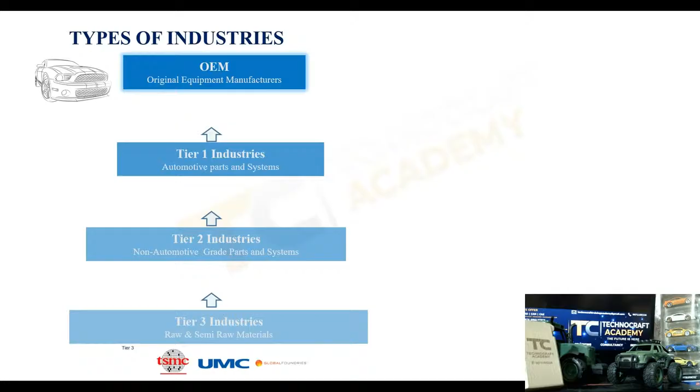And then we also have Valeo, Continental is for the ADAS, in India we can actually say that. And we have ZF.

When it comes to OEM, we have Volkswagen, GM, Toyota, Honda, Ford, Mercedes-Benz, Daimler, Tesla. When it comes to the Indian market, we have Tata, Mahindra and Mahindra, Suzuki, and Hyundai. These are the OEMs we can call it.

To build a particular car, they'll be having a lot of connections and contracts with the tier one, tier two, tier three companies, and they get all the relevant information and manufacture a medium industrial equipment, or else the complete car, truck, or bus, whatever it is.

Now, why do we need these tier one, tier two, tier three industries when the OEM can do everything by themselves? So why do they need to connect like this? When it comes to this answer, why they outsource, in short, they want to save on cost. Let's say if you want to hire someone, assume you're working in TCS, Tata Consultancy, or Mahindra, they need to pay you, right? And then you are a permanent employee of that company, right?

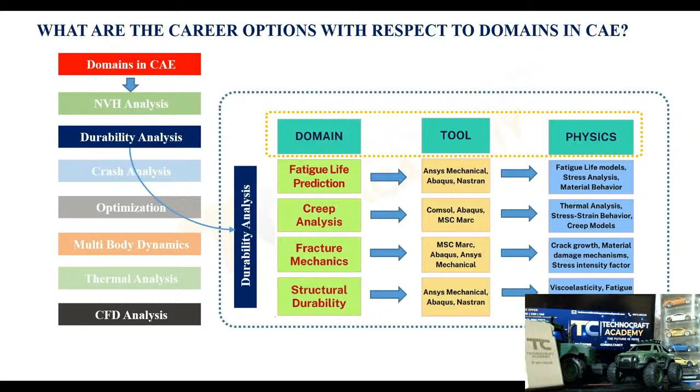Okay, assume you have a component, cranks or knuckles, whatever it is. You have designed it and it is weighing around 8 kg or 8.5 kg. That weight might not be needed. So let's say if you're working with the OEMs or any of the large scale industries, if a particular component or part is weighing that much and adding a lot of mass, what you can do is run the topology optimization and shape optimization as well as the sensitivity analysis to reduce the mass of it and also improve the performance of

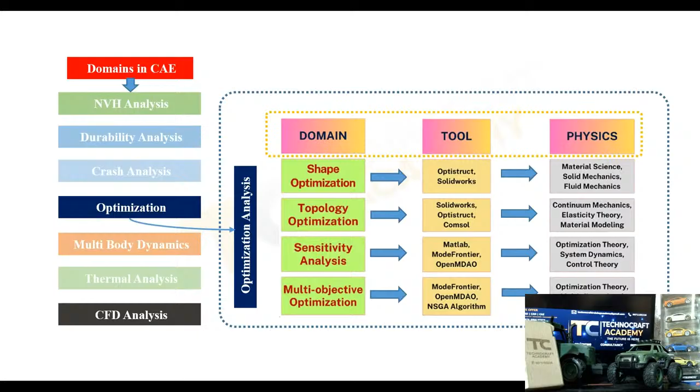the component. Also, whatever design you might have done might not be optimal to withstand that particular load, which is shape and sizing. You might even achieve the same requirement with less mass. That you can do here. When it comes to optimization, if you're working in small scale and medium scale, I recommend you use SolidWorks, but most predominantly OptiStruct will be used. So you could see the physics behind it. We can refer to it later also.

Let's see crash. When it comes to crash, there are a lot of things you can do under crash. It can get very difficult for you, so you need to start with any of the other domains and gain the knowledge out of it. See, we have crash. They couldn't handle the crash, so one of them had fallen on the wall, and the entire family died.

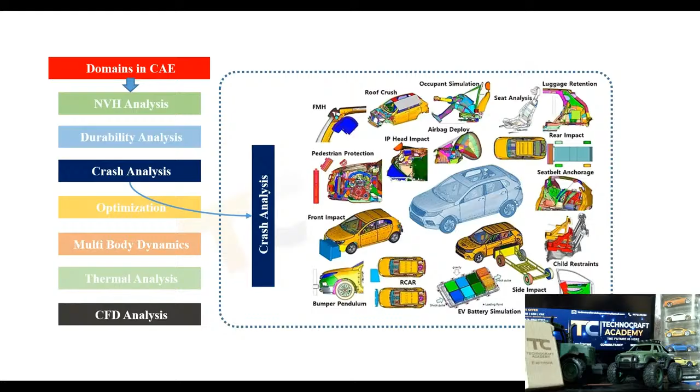Right. So same thing, occupant safety we have. Seat analysis, rear impact, side impact, child safety, EV battery simulations, car impact, the bumper, pedestrian. So a lot of analysis is there, even front impact. With all these analyses we optimize the car, and based on that we get ratings. Cost and all these things are very important. I hope you got to know a few things about all these domains. So first study accordingly, gain your experience, and get into the field if you're a fresher or you need experience.

Now let's start looking at it fresher-wise. If you're a fresher, you can start with OEMs like Tata or Mahindra. If you're an Indian working in other countries, let's say you target the biggest: Toyota, Suzuki, Mercedes, BMW. Getting into these as a fresher is quite difficult. If you are from the top universities, you can get in. But if you're a student of a local university, it's very difficult, so you need to gain experience. Now, what do we do? You need to set a strategy and a basic framework for that.

So how? First, know about yourself, where you're standing. If you're mechanical, you can consider aeronautical too. Where you're standing, what are the basics, what fundamentals you have. If you don't know anything, you can start from scratch. You can refer to strength of materials and build your basics. Or else you can do an MTech also if you're a graduate.

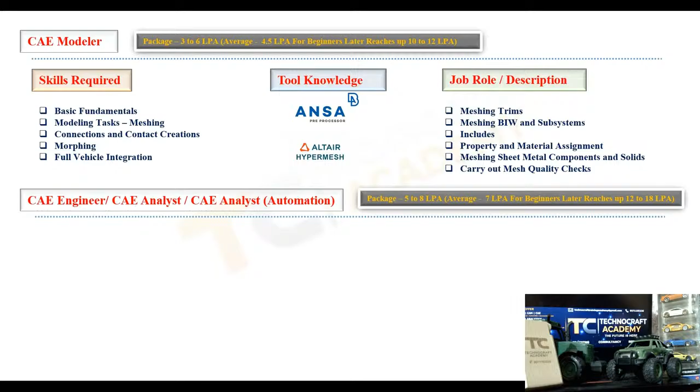And when it comes to CAE engineer, CAE analyst and CAE automation, CAE analyst automation, we call it. Yeah, this is the foremost job in your career, we could say. So the package will start with 8 LPA or 7 LPA if you're directly getting into OEMs. Yeah, and then it might go up to 18 LPA and then 25, 30 LPA. It depends.

Yeah, so what's required: you need to know about analysis, static and dynamic simulations, linear and non-linear dynamic simulations, explicit analysis, NVH, durability, automation, and then model debugging skills, optimization, coding also. See, automation engineer, so you should know about Python scripting also so that you can implement the automation. Let's say I want to do some automations, so you know the coding so that you can just process your simulation or validation.

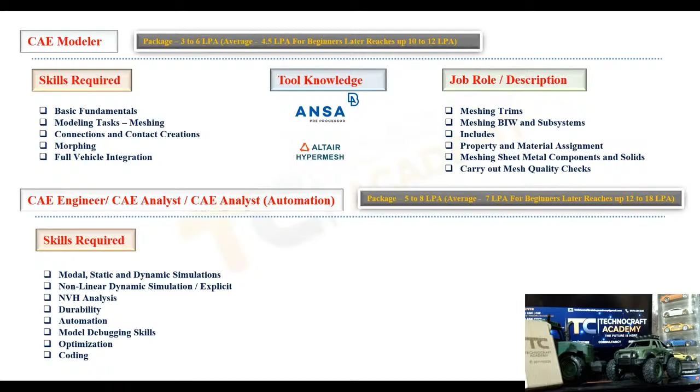Yeah. In short, what I could tell you is if I just want to post-process the results, automatically HyperView should open, and then it should load the stress and displacement, and then it should give me the graphs, and it should also plot the stress-strain curve for the non-linear analysis. And yeah, this is what it should be. How you want to script it. Simple. Tools known. So as I told, LS-DYNA, Abaqus, OptiStruct, ANSA. I think non-linear. Contact is important everywhere it is used.

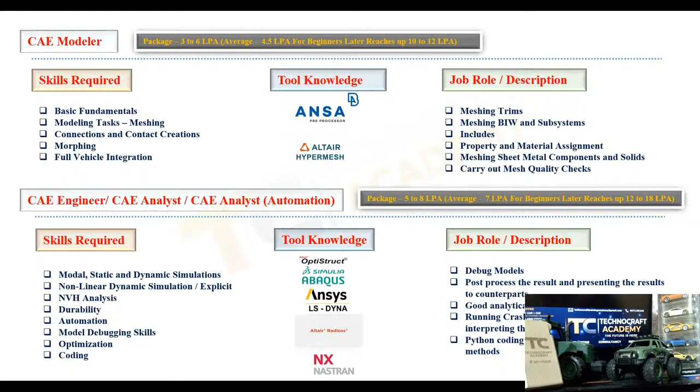Well, job role I told you, debug the model, post-process it, result presenting to the counterparts. You should be best in communication skills. Very important, guys. If you're weak in communication, you're gone. Better go through these spoken English sessions and try to improve your communication skills. Yeah? And then running crash and NVH jobs and interpreting the results. Very important. If you're failing to do that, then you're gone. You'll be fired on the spot. So next, Python coding for the automated process and the methods are also important. Yeah. Now this is all about the job roles, guys.

Now you already got to know what exactly you need to do if you're a fresher, what would be the career options for you. You got to know that. Now, we'll start our mastery in CAE from the scratch, starting with the history of FEA and FEM.

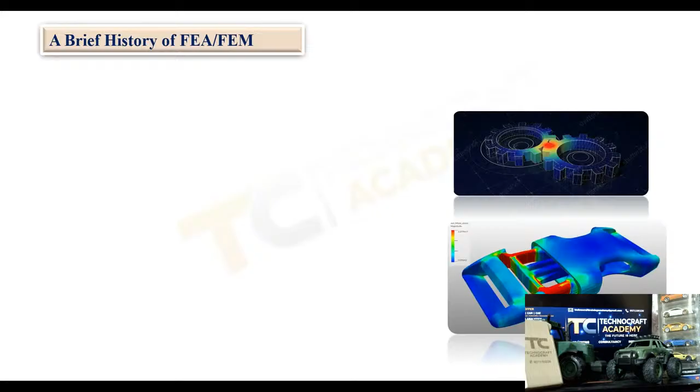Yeah, if you see, we have the brief history. I could grab a few things, not everything. If you want more details, please refer to some of the FEA books. But whatever is possible from my side, I tried to extract it and put it forward so that you can understand everything. Yeah, let's go through this.

First thing is, when exactly FE comes into the picture: the first paper, Stiffness and Deflection Analysis of Complex Structures, was published in 1956 by Turner, Clough, Martin and Topp. We generally consider this as the birth of the current finite element methods. Now, after that, in 1960, Clough coined the term finite element. Very important. He was the person who used this terminology.

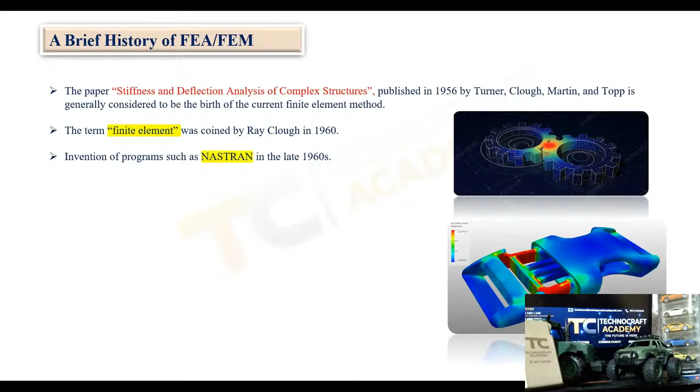Finite element. After that, there were programs like the Nastran we're currently using, right? In the 1960s only, they started developing programs to run this kind of analysis. And then there is the Courant approach: they divide the domain into finite triangular subregions to solve second order elliptic partial differential equations. It was mostly used for the torsion of a cylinder during that time.

Then later, this contribution was very important and evolutionary. They developed the partial differential equations. You could see the names of them: Rayleigh, Ritz, and then Galerkin. Together they developed these partial differential equations to solve the large body. We'll see that in detail next. And then later on, the finite element method was provided with a publication by Gilbert.

Then it started being used by different industries in electromagnetism, dynamics, structural analysis, everywhere. It was revolutionary, and everyone started using it to run the analysis and validate it before doing the physical testing. Physical testing takes a lot of money and time, so this helps us a lot to save money.

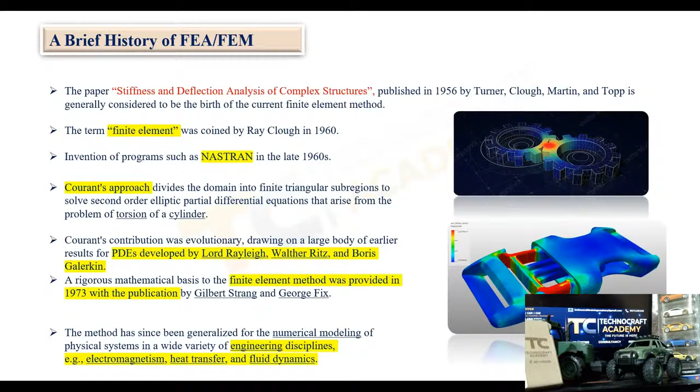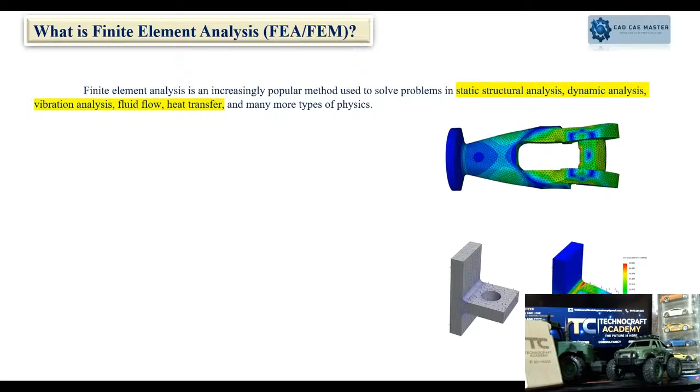Now, what is finite element analysis or FEM? You could see the definition here. Finite element analysis is an increasingly popular method used to solve problems in static structural analysis, dynamics, vibration, flow, heat transfer, and many more physics also. In short, finite element analysis is used everywhere.

For example, a classical analytical method considers a differential element to develop governing equations, usually in the form of partial differential equations. You're hearing this word again and again, right? If you're a fresher, that is all you might see. But you need to know about partial differential equations. Very, very important.

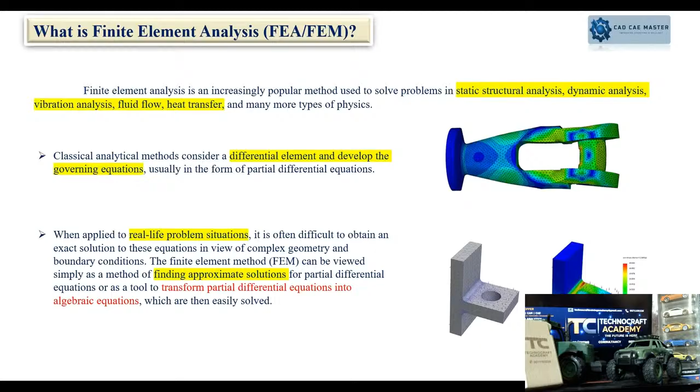If you consider a real life problem, say you want to obtain an exact solution for the equations of a complex geometry, practically can you do it? It is very difficult using the boundary conditions. Solving it only for 1D elements we could do, but for large components how is it possible? For that, FEM is a simple method: it approximates solutions for the partial differential equations, solves them with programs and gives the results, and you convert them into stress or strain, whatever it is. Let's see in detail how it is going to help us.

Finite element formulation. A solution for a field variable satisfying both boundary conditions and differential equations is unknown in general. Let's say you want to define boundary conditions, where you fix it, where you apply the load. How the equation is going to form, we don't know. So we begin with a trial solution. What is a trial solution? In short, it is used to satisfy the boundary conditions. Boundary conditions equal zero in this one.

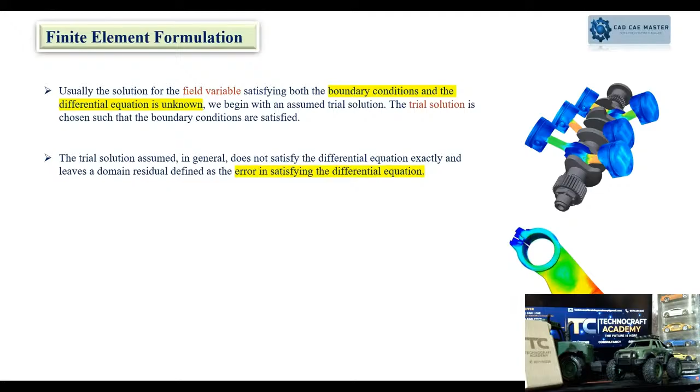Now, the trial solution does not satisfy the differential equation exactly. There will be a small error with respect to the differential equation. How are we going to correct this? For that, we have the weighted sum of the residual. This comes into the picture. We add approximate constants to render the entire residual to zero. It is quite difficult to grasp now, but if you go through it, you will definitely understand it.

Next, we try to discretize the domain into several segments, called finite elements, and use several piecewise continuous trial functions. What are these continuous trial functions?

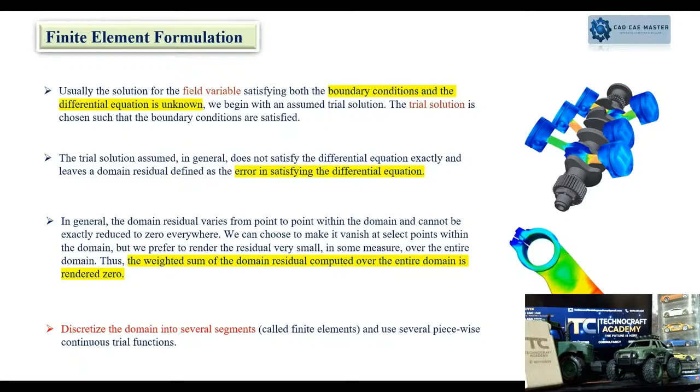Now, when it comes to trial function, it's just a segment in a particular... For example, let's say we want to solve a particular element inside the geometry. So we take it as a main function. Okay. And then in that, for each segment, we define a shape function.

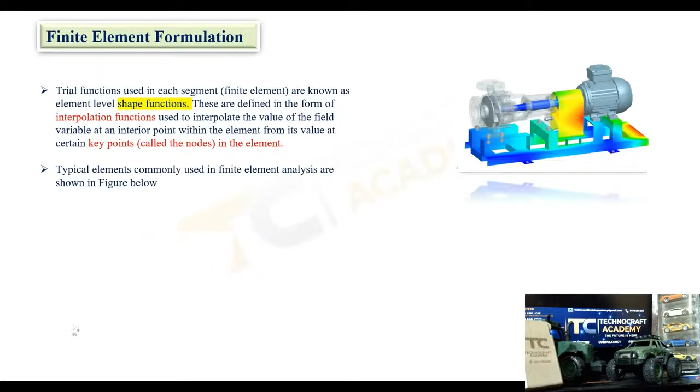What is shape function? In short, if you consider any of the elements, okay, if you don't know about the elements, there will be types of elements. I'll just show you this. It's the 1D element. See, these are the 2D elements, trias and quads. Second order element, first order. First order will have only the triangular element. Then comes second order, having six nodes. Okay. Now these are the 3D elements. We have the tetrahedral, hexahedral, okay, quadrilateral elements. Right?

If you consider this function, what we exactly do is, okay, we define the interpolation. Okay, we try to calculate the results on each of the key points, called nodes, in the element. Let's say if you consider a triangular element, on the three nodes, we have to extract this. Okay, and then we try to form a stiffness matrix for this element.

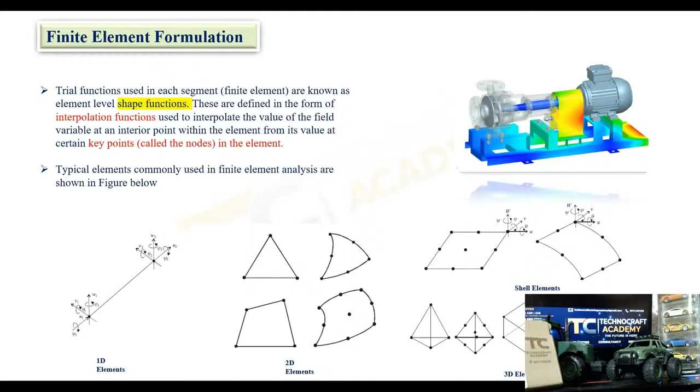Let's say, in short, we have the shape function for each element. We try to get the weighted sum for the domain residual, okay, for each element. Then we sum up all the elements to get again the weighted sum for the entire domain. Using weighted sum, why? Because we consider one approximate constant to equate it. For that we take it as weighted sum.

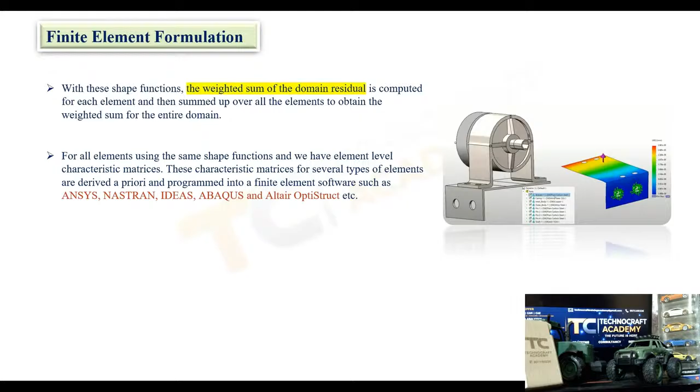Now, once we have all the weighted sum in the form of the matrix, or a stiffness matrix, and once we have the shape functions for that model on each and every node, having the boundary conditions defined, we need to solve it, right? So we call it the stiffness matrix. We call it a matrix.

So now to solve this matrix, we develop programs like ANSYS, Abaqus, OptiStruct, right? And these programs will solve this matrix and give us the results and convert it to different forms. Now, that is what I explained.

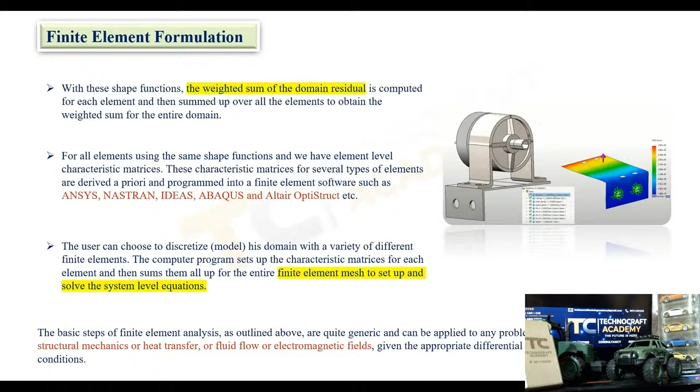Okay, now let's directly get into whatever expression I have given. This is for each and every field. Okay, let's say thermal, structures, flow, and then electromagnetic analysis. So this is the scenario for now. We'll see the exact process, what exactly we do in this at the end.

Assume we have the Young's modulus, Poisson's ratio, and density defined; this is a rectangle. Consider the thickness is 5. Now we define the material properties. Young's modulus is very important. If you do static analysis until the elastic limit, you will have stress proportionality, right? And so they are satisfactory for that component. If it is going beyond that, for a particular component, 230 or 240 is the maximum elastic stress which it can withstand. If it goes beyond that, then definitely the component is not stable and it is going beyond elastic.

We can consider Poisson's ratio, change in length to the original length, and the density, the measure of mass. Now we define the material for the component. What next? We define the boundary conditions. So here we apply the fixture where exactly the component needs to be fixed in a critical scenario, and then apply the force in another direction. It might be simple, it might be complicated, it might have multiple loads applied. But here is a simple scenario. Once I have fixed it and I'm just trying to pull it, I have defined boundary conditions.

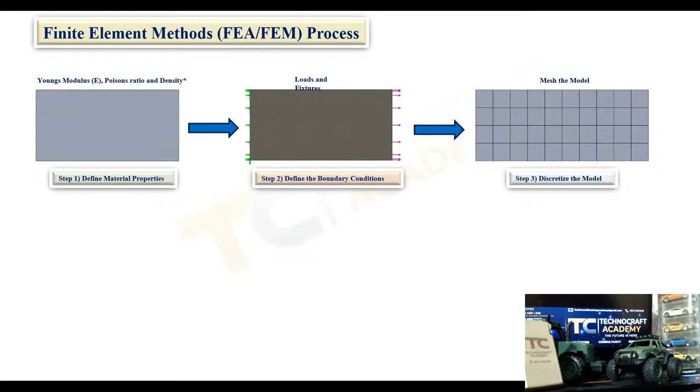Once we do that, we try to solve the residual functions for each and every element on the nodes, build up the results and equations. And that particular stiffness matrix for that particular element will be summed up for each and every element into a global stiffness matrix. Okay, that matrix will be taken for the analysis.

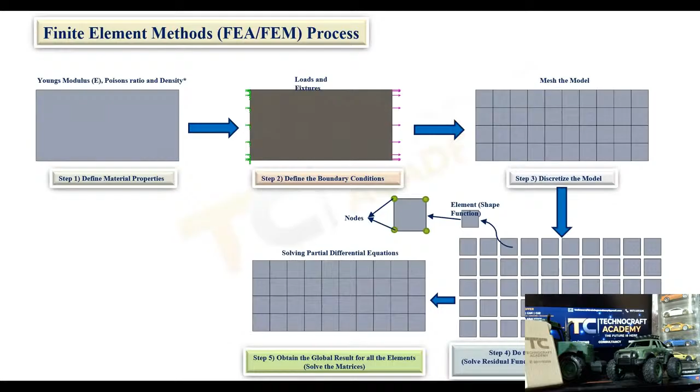Any of the programming will solve it and get the results. Let's see, we have the shape of the model, we have the nodes on that, we solve these equations. Okay, we will use partial differential equations. Again, it is a big thing, so we'll see that. Obtain the results, solve the results. We're going to obtain the stress or strain or the factor of safety and the displacement.

So, first, what we get is the displacement, in the form of u of x comma y, and that will be converted again to the stress, strain, or the factor of safety and other required things. This is the complete process for the CAE.

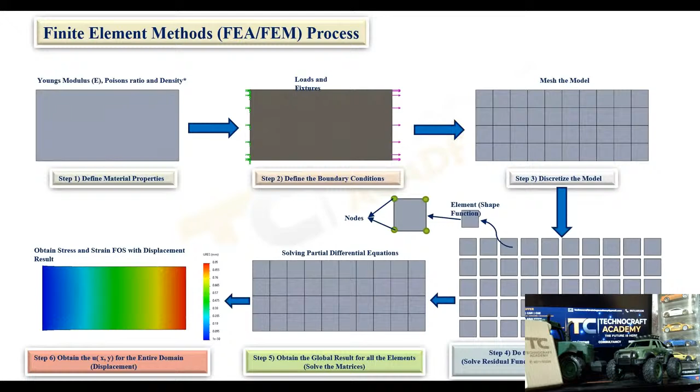Next, we'll see the governing equations. So what is a partial differential equation? How is it formed? For that explanation, first we'll see: we have the variational method, we have the Galerkin's weighted residual method. Let's see, the first one is the direct method.

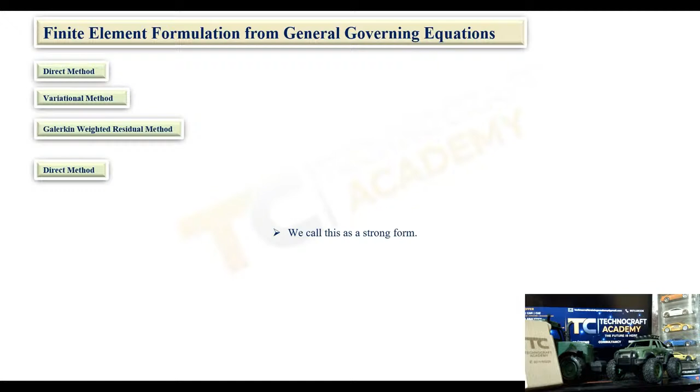This is a strong form. It's the equation for the direct method. It considers modulus into moment of inertia, then boundary conditions, and we try to solve it to get the results. But this equation is used only for the beam problems, in 2D in short, not for complex components. Now these are also differential equations.

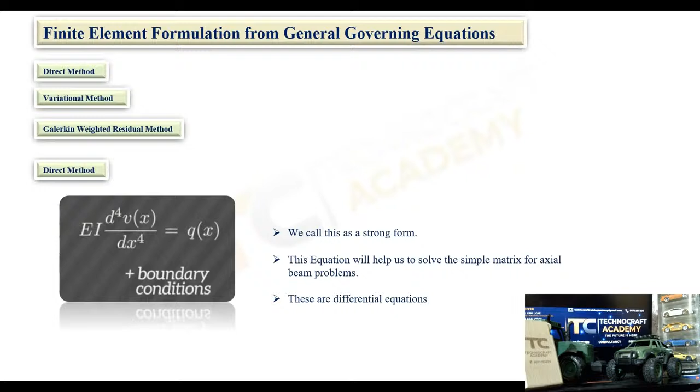Now when it comes to the variational method or Galerkin's weighted residual method, these are the weak forms, or integral forms. We use the integral forms to solve them. So we use the approximate solution for equilibrium equations. The results we get in the end are not 100% accurate. 80 to 90% we can assume, but the results you're getting are not at all 100% accurate, and that is enough to achieve the analysis.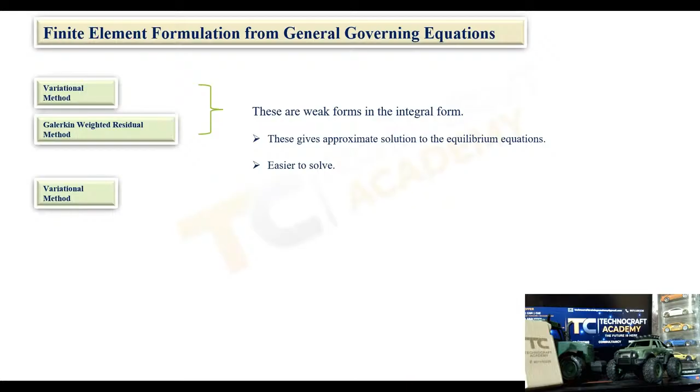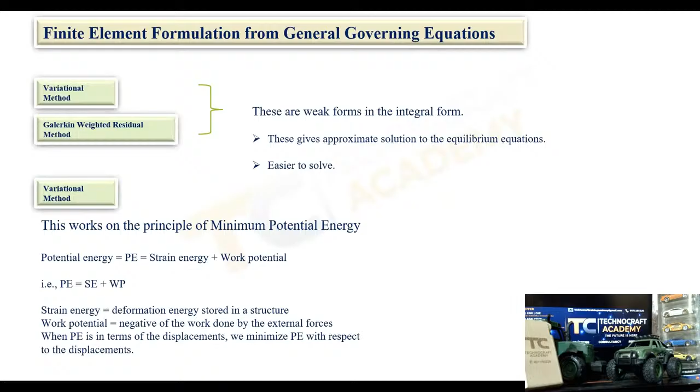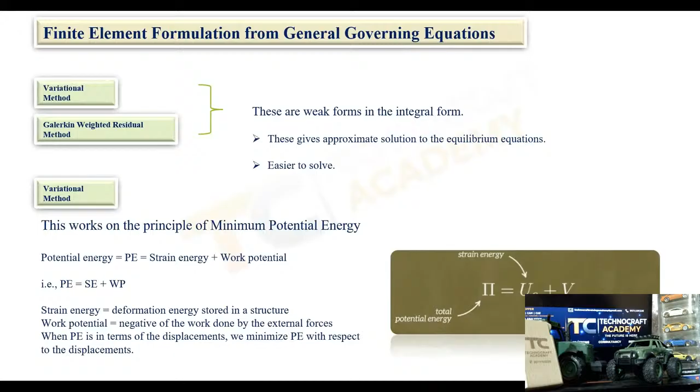Now, let's see what the variational method is. In short, the variational method works on minimum potential energy. Potential energy, you already know: strain energy, the energy stored in the structure, and work potential, the negative work done by the external force. If we combine these two, we get potential energy in terms of displacement, and we try to minimize it. So this is the equation: total potential energy is equal to strain energy plus potential energy of external force.

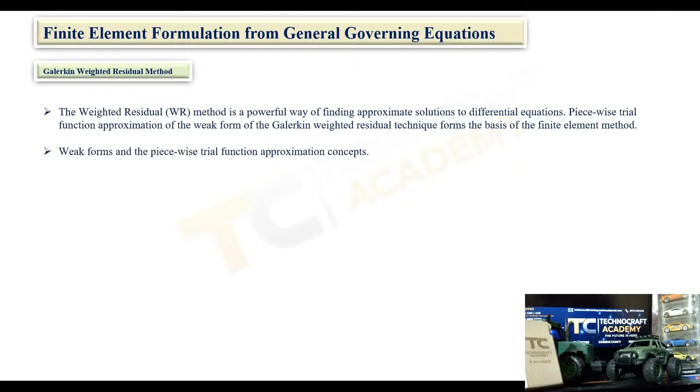Now we'll see the Galerkin's weighted residual method. This is the very important topic here; this is what we use everywhere. This method is a powerful way of finding approximate solutions to differential equations. We use piecewise trial functions here to approximate these weak forms. We call it the Galerkin's residual technique. Weak forms and piecewise trial functions give the approximate solutions. I'll try to explain in short with an example.

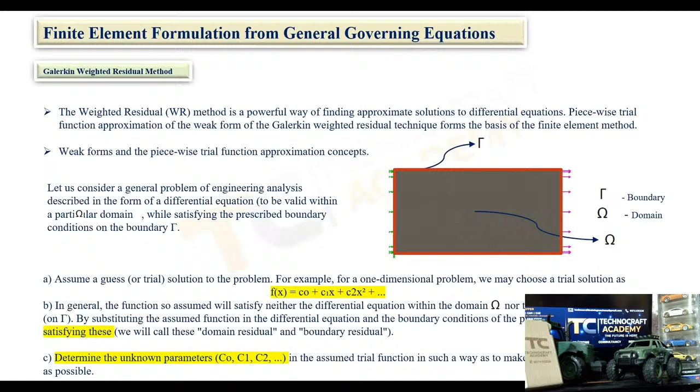If you consider Gamma as a boundary, in the image you could see, and then we have omega as a domain, we consider this as a problem. How do we solve it? Assume we have the problem and we try to use trial solutions. We have f of x equal to c0 plus c1 x plus c2 x squared, a trial function. Then we try to apply the boundary conditions. What exactly we do here is determine C0, C1, C2. So how do we do it?

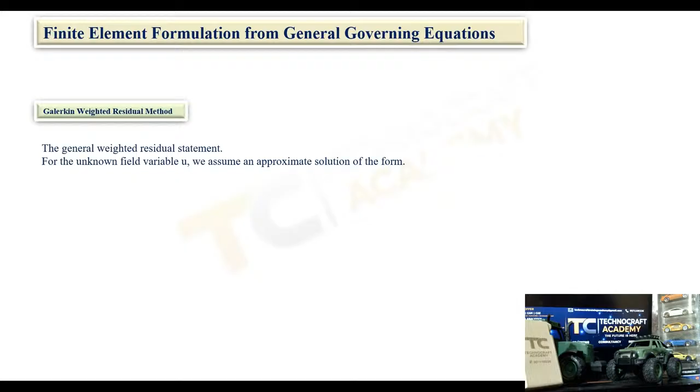By using the Galerkin's weighted residual method in general, we try to find the unknown, that is u. We assume the approximate solution of this form, the equation I just showed you. Here Ci is the independent coefficient. By the weighted residual process, Ni are pre-selected such that displacement should satisfy all the prescribed boundary conditions.

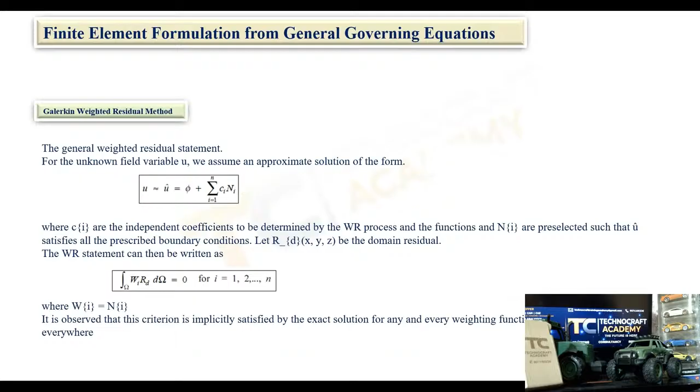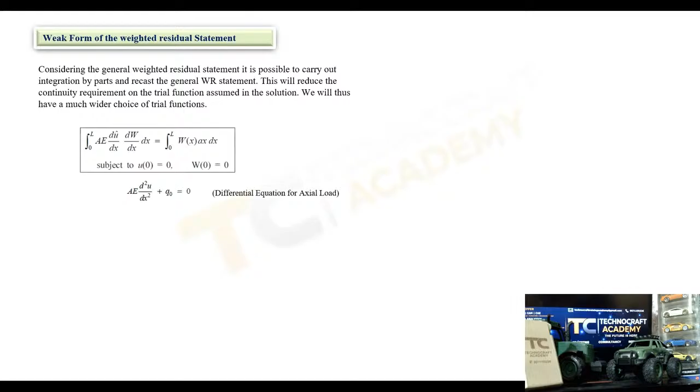Now, consider this equation, i equal to 1 to n over the domain, we try to find where wi, the residual function, equal to ni, is made to be 0. For example, considering the weak form of the residual statement, this is the differential equation for the axial load. We fit it into the formula and get AE times the second derivative of u with respect to x, plus q0, which is equal to 0.

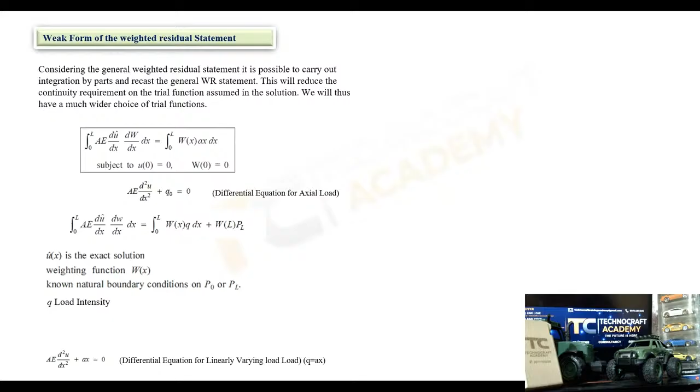This is what we solve for each element when it comes to displacement on the nodes, the matrix U1, U2, U3, U4. We calculate for all the nodes and feed this into the equation, which feeds into another equation, giving us the stiffness matrix into displacement. We solve for the force to get the displacement: displacement equals inverse of stiffness matrix times force.

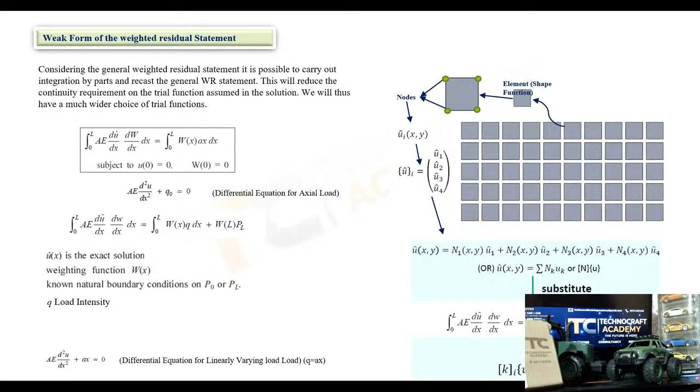Now, let me summarize this here. We have a one-D element. For example, a stiffness matrix problem needs to be expressed in the form of a partial differential equation.

Here we have the load P of x along this direction, moving in x, and I'm moving this with respect to P of x plus delta x, so the change in length. There is total length, this is the force applied, this is U1 and U2. Consider this example of an axially loaded elastic bar.

Consider the definition of stress, strain, and Hooke's law. Stress equals force per unit area, so P is the force and, considering the area, we get the stress. Strain is change in length to the original length, delta L over the original length. Hooke's law states that under elastic limit conditions, stress is directly proportional to strain, using a proportionality constant. So if you double the stress, the strain also doubles under elastic limit conditions.

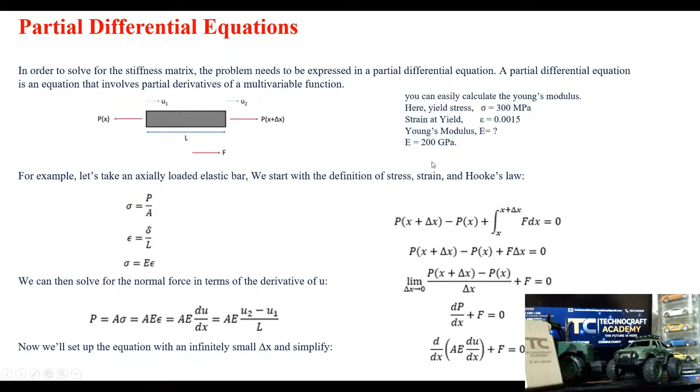Correct. Likewise, we try to solve the problems. Now, let me take you through the different types of general equilibrium equations. We have the general equilibrium equation for everything. This is the mass matrix, where we have acceleration, plus the damping matrix with velocity, plus the stiffness matrix with displacement, which is equal to the applied load.

If you want to solve for static analysis, these two terms become zero because there is no acceleration and no velocity, only displacement. So stiffness matrix into displacement equals load. That's what happens in static analysis.

Now, buckling analysis has a completely different formula. We have K, plus the eigenvalue lambda, plus KD, that is the differential or geometric stiffness, then the eigenvector, which is equal to eigenvalue into load. Here we try to find the buckling loads through buckling analysis, and check whether the component is going to buckle or not.

For vibration analysis, we take this equation again. We consider the mass matrix where we account for acceleration, and then try to solve this one.

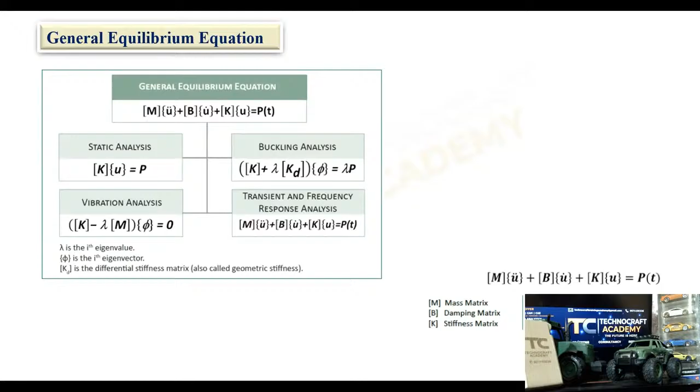I hope this is clear for you guys. This complete equation will be generalized, and based on your requirement for static, buckling, vibration, dynamic, linear or non-linear analysis, we change it based on the acceleration, velocity, displacement values, and the boundary conditions.

How do we solve engineering problems? We got to know everything, right? So now there are different methods: the analytical method, numerical method, and experimental method.

Currently we use the analytical method and the numerical methods. We also use the experimental method, but it's costlier, so we try to depend less on it. We test it on one component, then we make decisions.

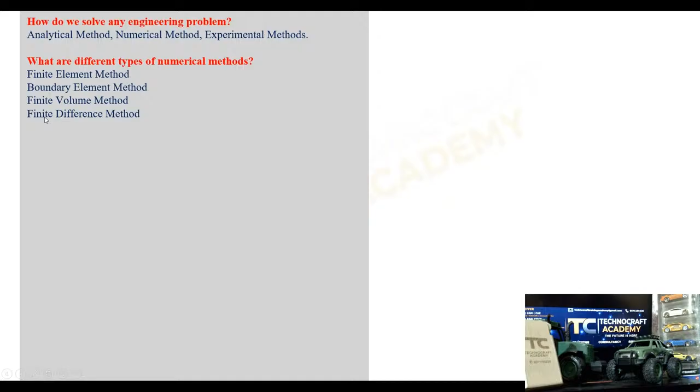There are different types of numerical methods again: the finite element method, which is predominantly used, the boundary element method, the finite volume method, and the finite difference method.

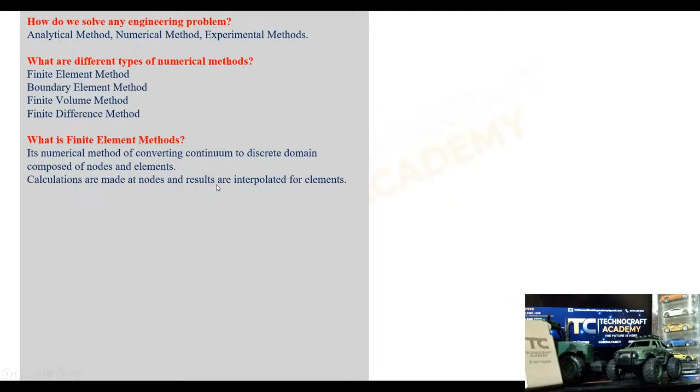Right now, when it comes to the finite element method, what exactly happens? We try to calculate the results at the nodes of each and every element. Each elemental node is considered, and the results are extracted from there.

When it comes to the boundary element method, the calculations are made at boundary nodes, and the results are interpolated for the elements. For example, if you consider heat transfer problems, we use that.

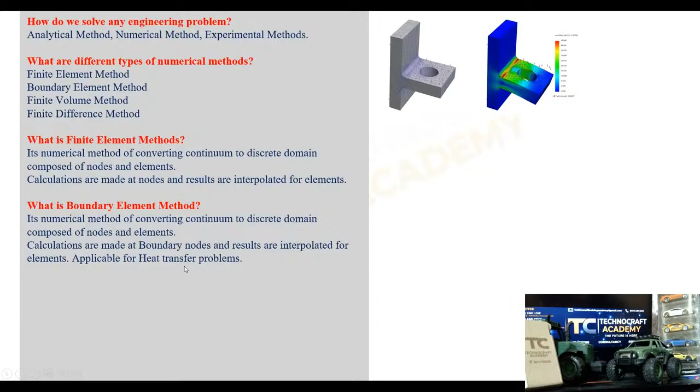Now, finite volume method. What exactly do we do here? It's based on the Navier-Stokes equation. If you want to get into the CFD domain, you need to know about the Navier-Stokes equation. It's a completely different domain, you need to know much about it, including laminar flow, turbulent flow, and Reynolds number. A lot of things will be there in that.

Now we have the finite difference method, where we try to use the Taylor series to solve the problem. I hope this is clear.

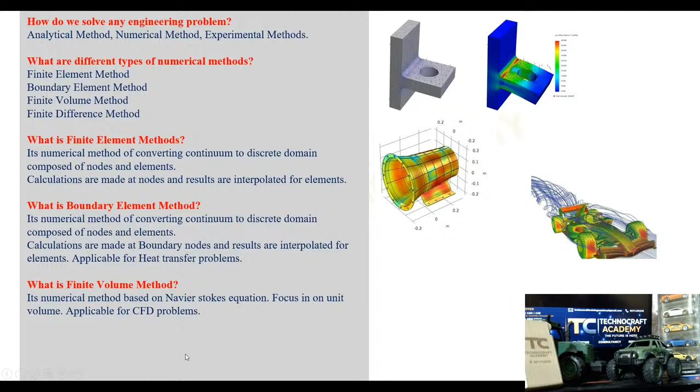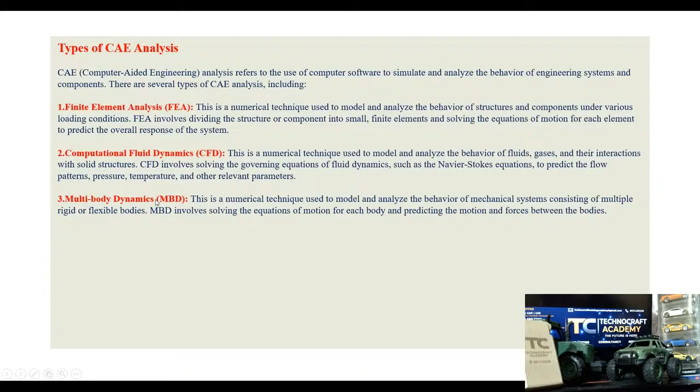Now when it comes to CAE analysis types, we have FEA, CFD, multi-body dynamics, thermal analysis, electromagnetic analysis, and optimization analysis. As I said guys, you can focus on FEA, CFD, optimization, electromagnetic analysis, or thermal analysis, and build mastery in any one domain or all the domains.

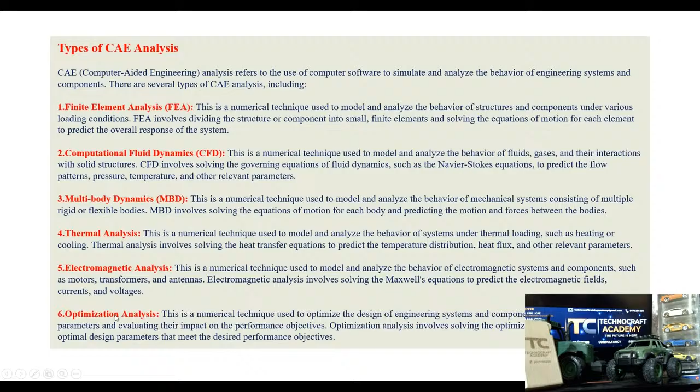It's quite difficult to gain experience in all the domains, though if you're an expert, you can even try that. But I would recommend FEA as the most prominent, and you can refer to optimization, thermal analysis, and CFD as the initial stage.

Now, when it comes to FE analysis, we have static analysis workflows. What we try to do is solve the equations under the elastic limit and extract the stress and deformation, and then dynamic analysis.

Here we try to solve the equations with vibration as the input, and we try to extract dynamic responses such as natural frequency, mode shapes, and damping ratios.

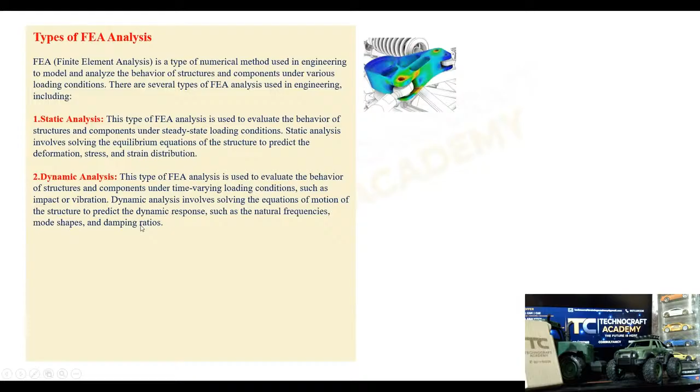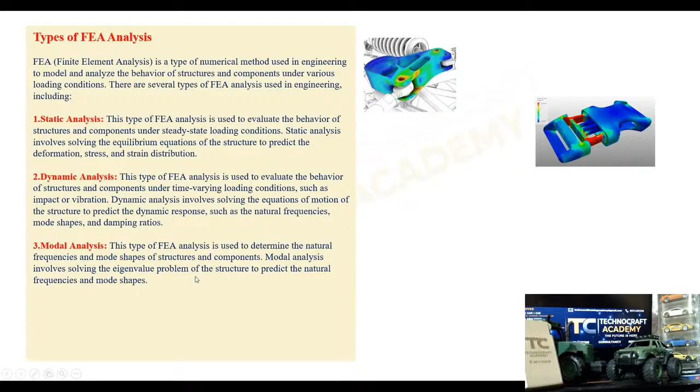Then we have modal analysis, where we check for mode shapes and frequencies, how it's going to happen, and mostly we use it to see how the component behaves at a particular frequency, and accordingly we solve the results.

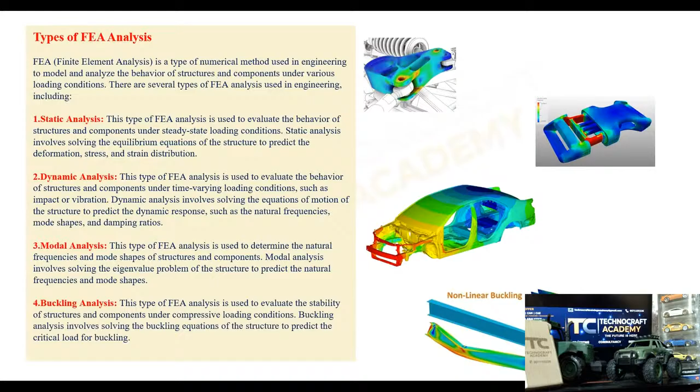And buckling analysis. What exactly do we do? We check whether the component is going to buckle with respect to the given load. If it is buckling, then we try to optimize the component to resolve that buckling.

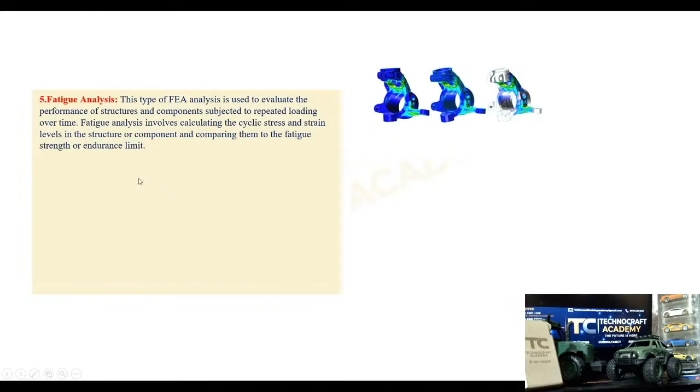Now the last one is the fatigue analysis. So what we try to do is repeated loads will be applied, and with that we determine how many cycles it is going to withstand. Based on that, we do the durability analysis, get the results, and make the decisions.

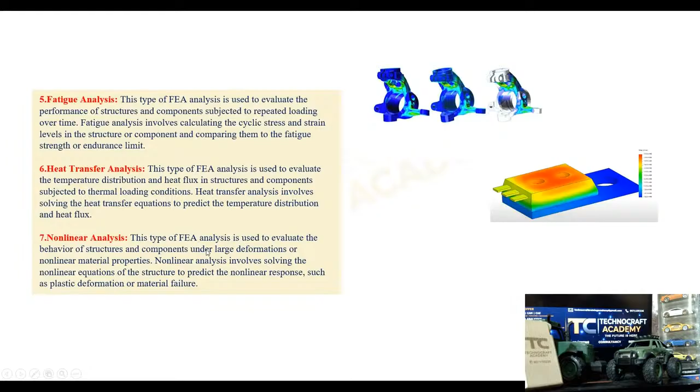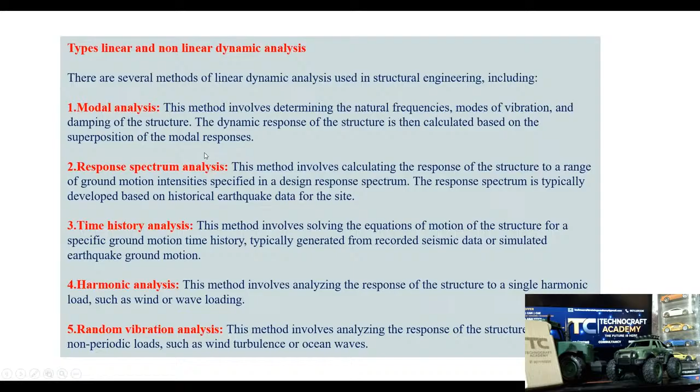Now, when it comes to linear dynamic analysis, we have modal analysis, response spectrum, time history analysis, harmonic, and random vibration. It is again completely a deep dive, so I'm not going to take you through that, guys. You can refer some videos, or else you can refer my YouTube also to go in detail.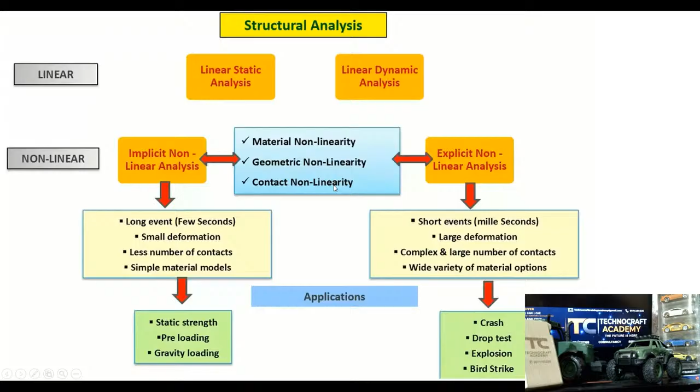Do we solve this? If you want to solve the non-linear analysis, you need to have the non-linear material properties, geometric non-linearity with respect to geometric shape, how this linearity is going to impact your model - that you need to analyze, and the contact also, how you need to define the contact.

When it comes to explicit, we try to apply the load within a couple of milliseconds, and large deformation - we do not ignore the analysis of that. So explicit lies between implicit and static, or rather implicit lies between explicit and static.

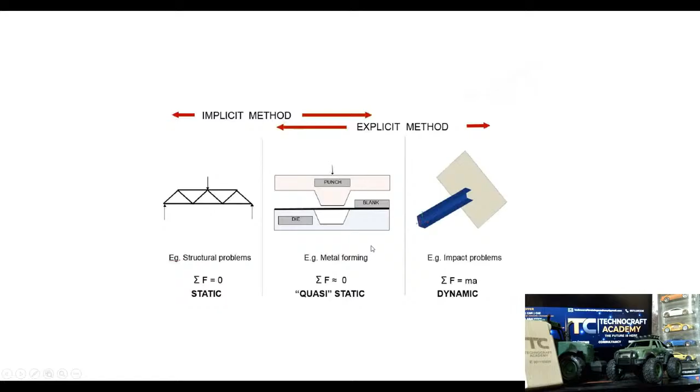For example, forming analysis, sheet metal forming - we do this, and there we follow this approach, where we try to get the plastic deformation when it comes to bending. That bending is necessary, the plastic deformation is necessary for us. So that is called quasi-static - not the non-linear, but in between static and dynamic.

So in short, this is exactly the difference. What we do here in impact and fully dynamic, we try to apply one load all at once. But in between, we try to apply load from zero - let's say 0.1, 0.2, 0.3, like this up to 1 in increments. The load will be kept constant here.

So slowly, the load is applied. When it comes to deformation and forming, the load will be slowly applied and then at the end it will be the full load.

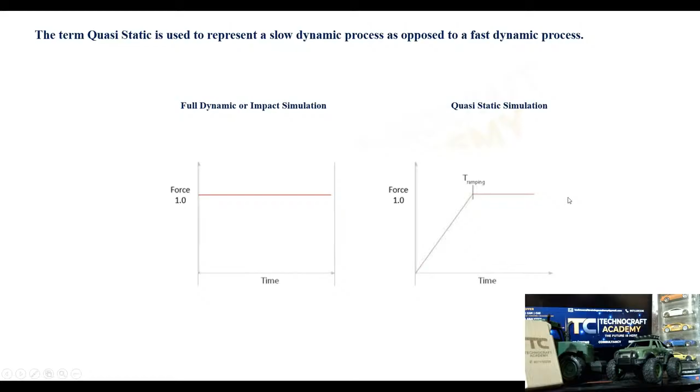That's clear, right? And this is about the properties. When it comes to CAE, you need to remember mechanical properties. We have the yield strength, which we call the maximum tensile stress a material can withstand before permanent deformation.

So whatever the region is behind it, it is all safe. We call it the proportional limit. Ultimate strength is the maximum stress before failure. Okay, this is the failure point. This is the ultimate point. Here, the component will definitely fail. And then the fracture point is where the failure occurred. This we call the failure point.

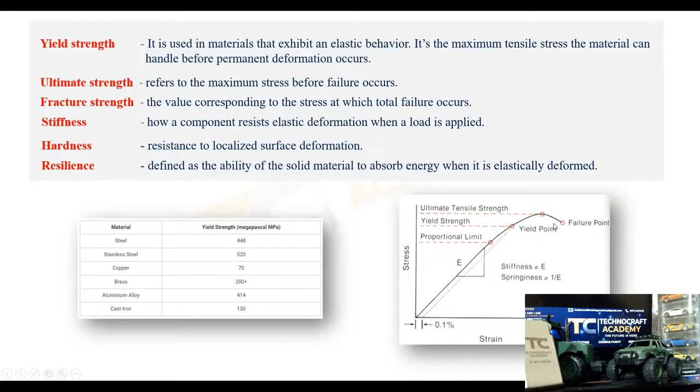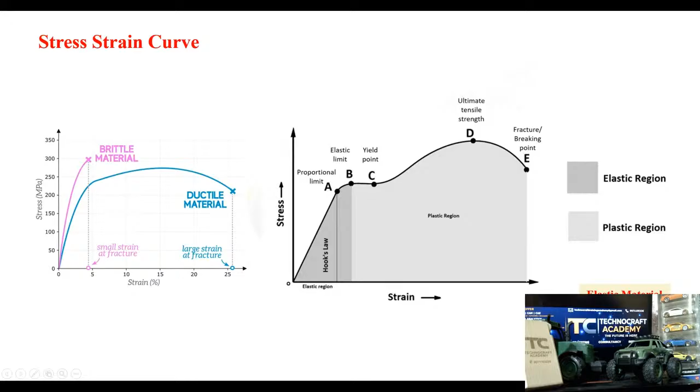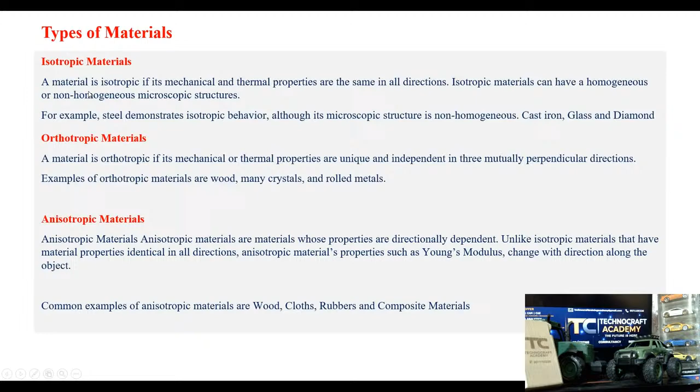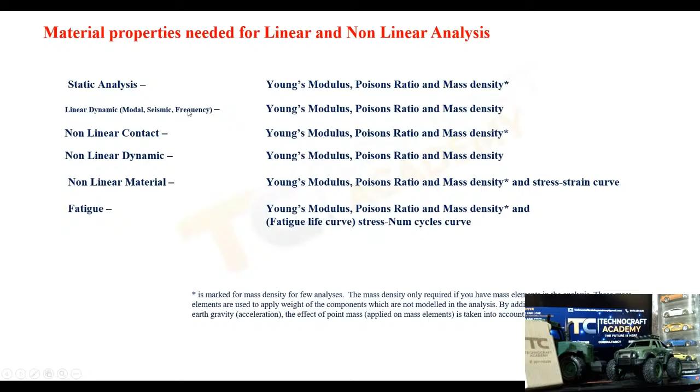These are the material properties needed for linear and non-linear analysis. For static, we use modulus, Poisson's ratio, and mass density for mass calculation. For non-linear contact we define all these parameters. For fatigue, we use Young's modulus, Poisson's ratio, mass density, and the stress versus number of cycles curve. For non-linear material, we need the stress-strain curve and non-linear material data. Star means only for that analysis. For linear dynamic modal frequency analysis, we need the mass density.

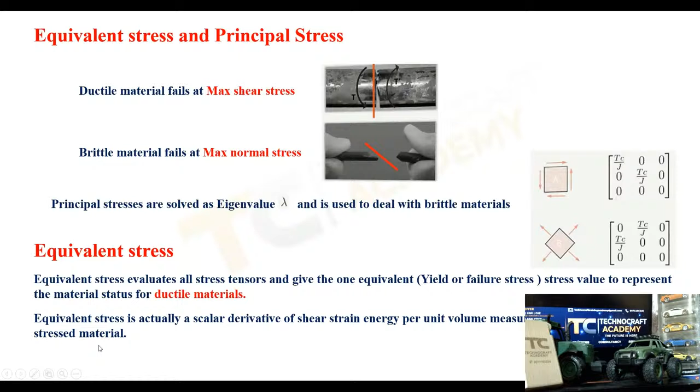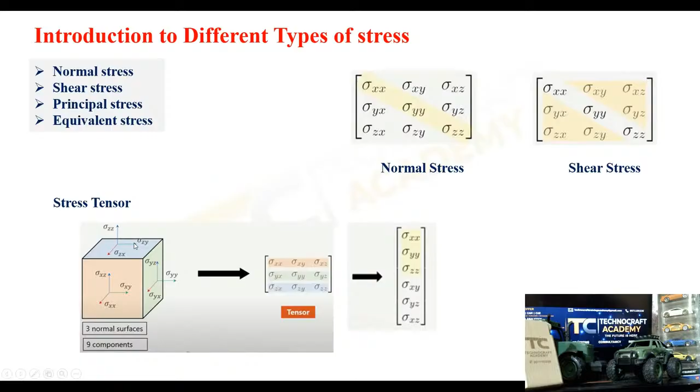materials. The stress is usually acting as a scalar, okay, shear strain energy per unit volume measured at different points in a stressed material. If we consider this one, we are not going to consider all these stress tensors. When it comes to equivalent stress, right, one average for that particular element. Yeah.

So now this means that in linear analysis the flexibility of the structure needs only to be calculated once. So you don't need to do the analysis every time. Once you have the stiffness matrix, that is more than sufficient. You can use it for all the solutions. But when it comes to non-linear, it is not the case. We do it for forging, stamping, crash tests, and rubber analysis. For example, let's say for all the physics that exhibit non-linearity, linear static analysis can't be performed for the purpose.

For example, if you consider non-linear, for each and every loop, you need to change the stiffness matrix. Okay. Let's say for the linear spring, stiffness is constant. Now, when it comes to non-linear, you can see the stiffness will be different. Okay, it will change. So now you can see the stiffness is now dependent on the displacement. Okay, what exactly will happen here is flexibility can no longer be multiplied by the load. Okay, now we need to calculate each and every stiffness matrix in the non-linear analysis.

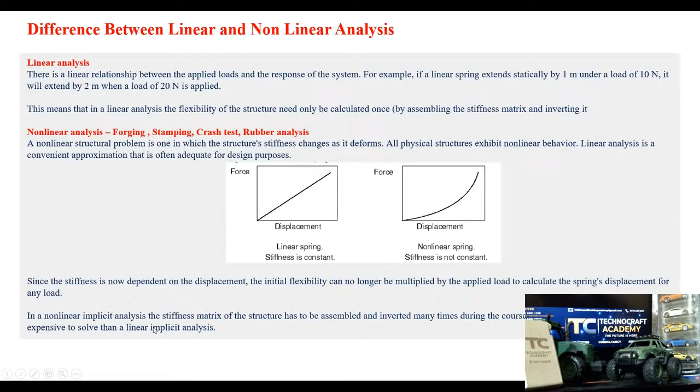So again, for that, this particular solution might not be available for simple software; SolidWorks Simulation is not that good for nonlinear analysis because that algorithm is not going to support complex nonlinear and dynamic explicit analysis for the automotive industries. For small scale industries, you can do that, but when it comes to automotive industries, it is quite difficult. Yep. I hope it is clear.

And yeah, I would like to conclude the session here. This is most of the basics we have covered. So from this session, I hope you got to know what exactly you need to do as a fresher, or if you're experienced. We went through the basics of FEA, how it started. We have already seen some types in the FEA and CAE field. So what is important, how we need to start a career, and then the basic requirements. We covered the basics of FEA and FEM.

Yeah, in the later sessions, I'll be taking you through the examples. So structural analysis basics will be covered, and then we'll jump into Crash and NVH analysis in depth so that people can experience it, and that might be helpful for you to gain experience and get into any of the OEMs or medium scale industries to get a job.